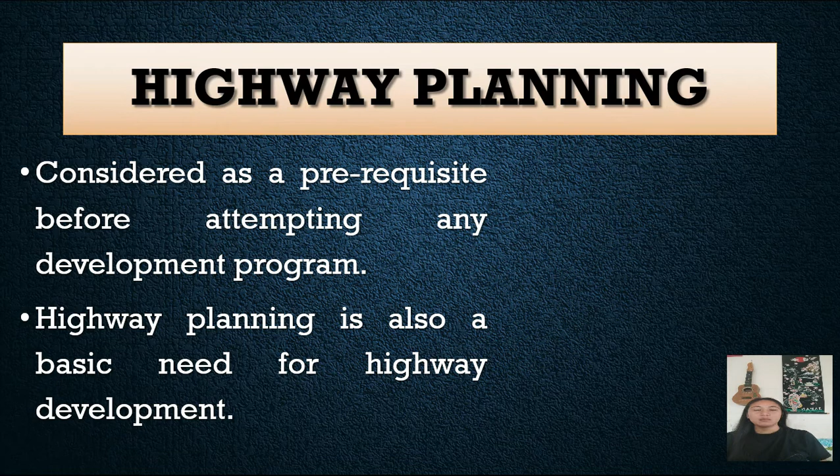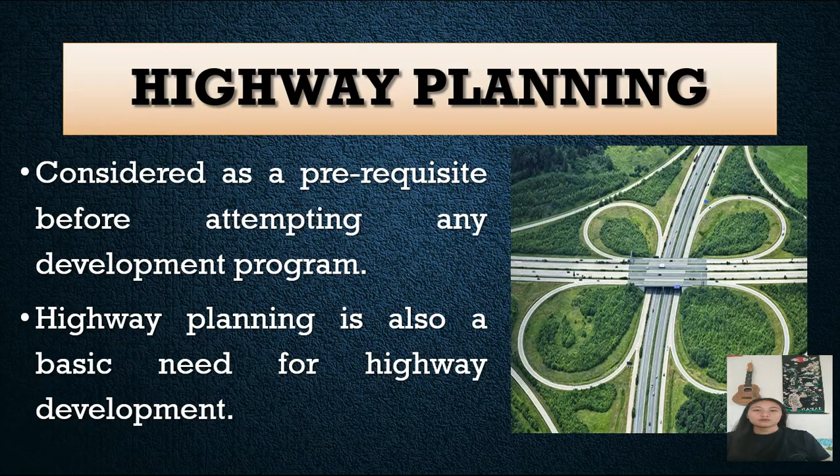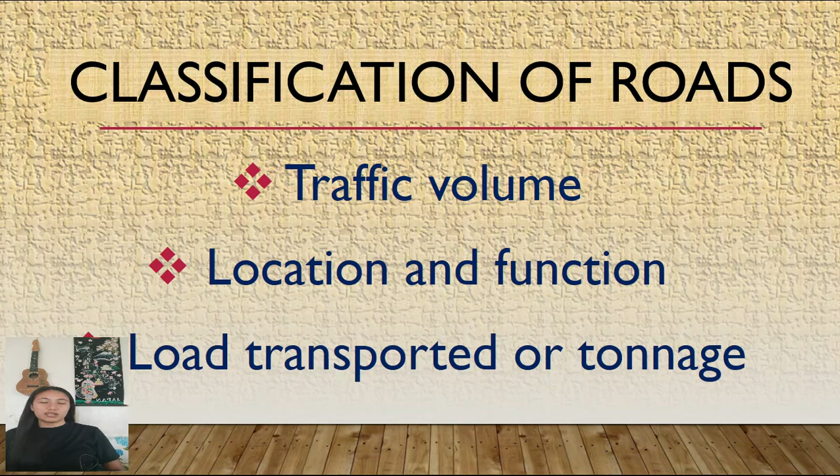Third, to fix phase-wise priorities for development of each road link. Fourth, to plan for future requirements and improvements of roads. And lastly, to work out a financing system. Roads are generally classified on the following basis: traffic volume, location and function, and load transported or tonnage. Let's discuss them one by one.

Based on the traffic volume, roads are classified as light, medium, and heavy traffic roads. First is the light traffic roads. Roads carrying less than 400 vehicles daily on average are called light traffic roads. Second is the medium traffic roads. If a road is carrying 400 to 1,000 vehicles per day, then it is said to be a medium traffic road. And lastly, the heavy traffic roads. If a road is carrying more than 1,000 vehicles per day, it is said to be a heavy traffic road.

Based on location and function, they are national highways, state highways, major district roads, other district roads, and village roads. National highways are main roads of a particular country. They connect all major cities to the capital of the country. They run throughout the length and breadth of the country. A minimum 2-lane road is provided for national highways.

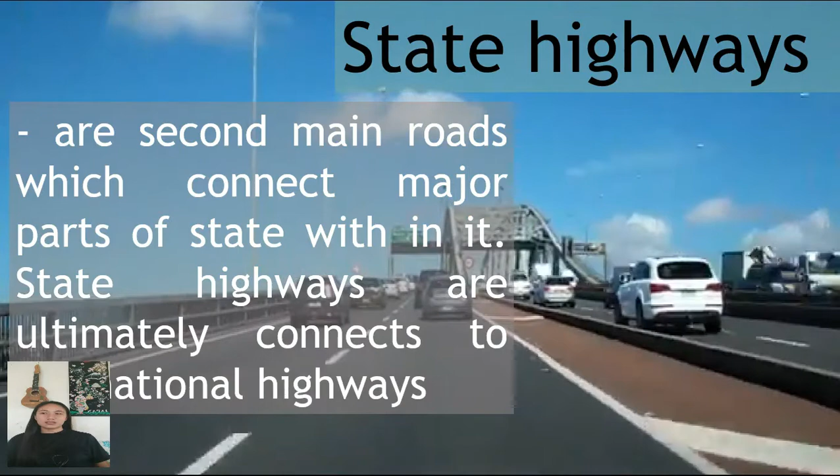State highways are second main roads which connect major parts of states within it. State highways ultimately connect to the national highways. Major district roads are important roads within a district serving areas of production and markets and connecting those with each other or with the main highways of the district.

Other district roads are roads serving rural areas of production and providing them with an outlet to market centers, taluk headquarters, block development headquarters, or other main roads. Village roads are roads connecting villages or groups of villages with each other or to the nearest road of a higher category. Usually low quality roads are provided as village roads because of low traffic.

And lastly is based on load transported or tonnage. The classification based on load or tonnage is relative, and the roads may be classified as Class 1, 2, etc., or Class A, B, etc. And the limits may be expressed as tons per day.

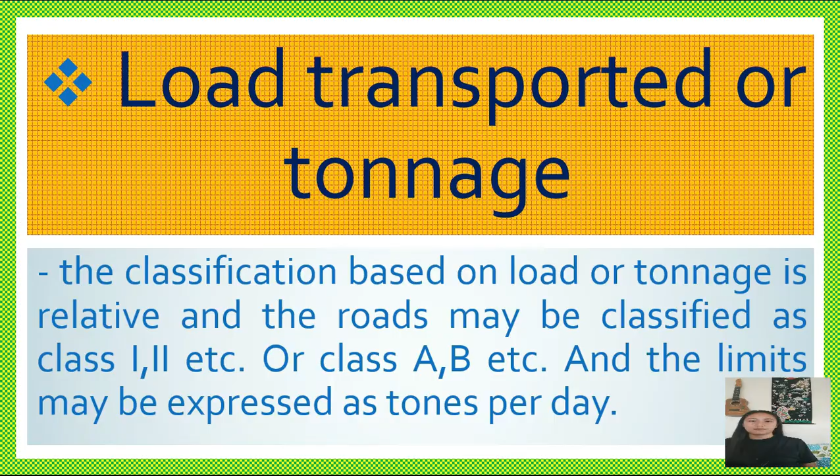Next is the classification of urban roads. They are arterial roads, subarterial roads, collector streets, and local streets. Arterials and subarterials are streets primarily for through traffic on a continuous route, but the subarterials have a lower level of traffic mobility than the arterials. Collector streets provide access to arterial streets, and they collect and distribute traffic from and to local streets, which provide access to abutting property.

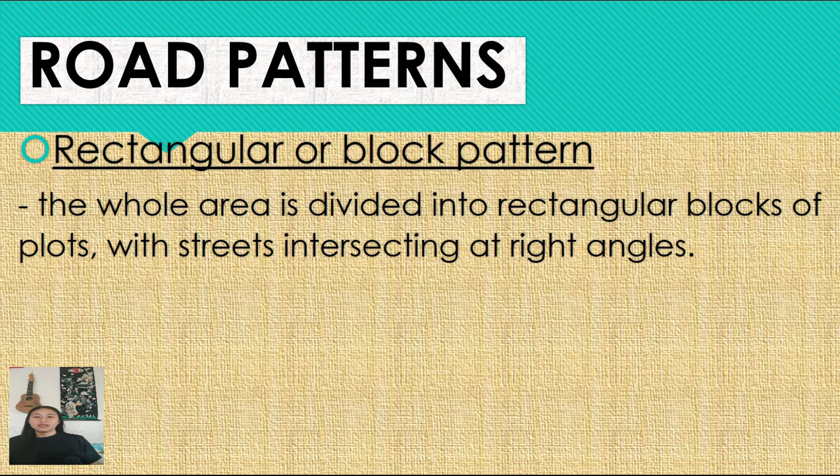Next, we'll talk about the different road patterns. First is the rectangular or block pattern. In this pattern, the whole area is divided into rectangular blocks of plots, with streets intersecting at right angles. The main road, which passes through the center of the area, should be sufficiently wide, and other branch roads may be comparatively narrow. The main road provides a direct approach to outside the city.

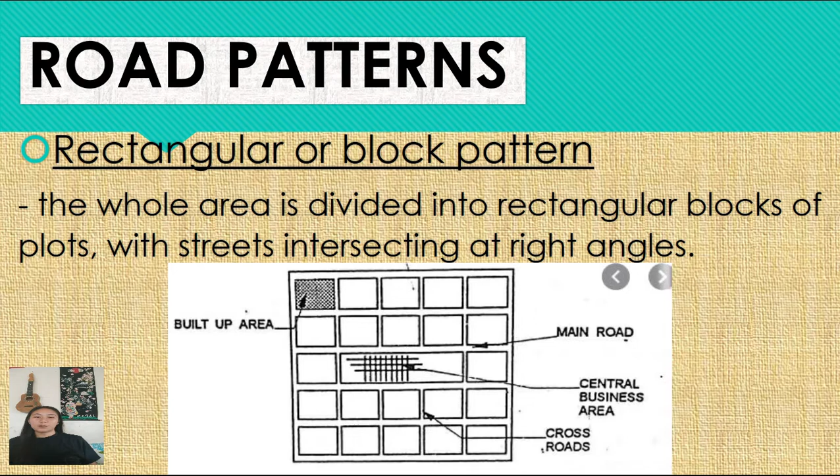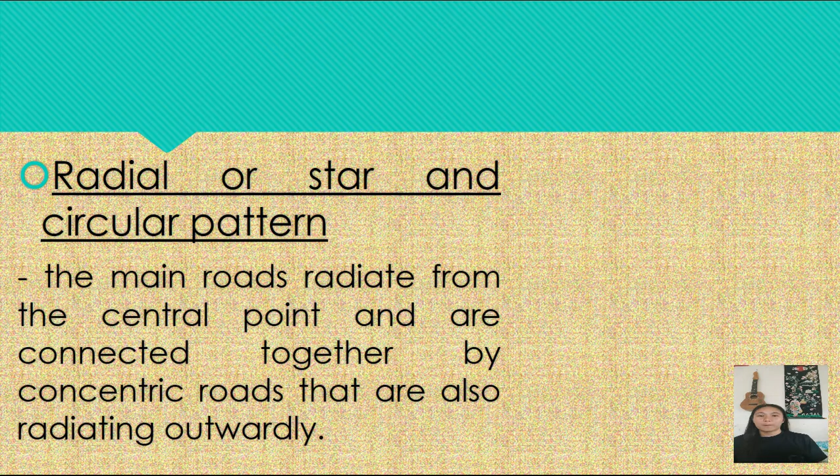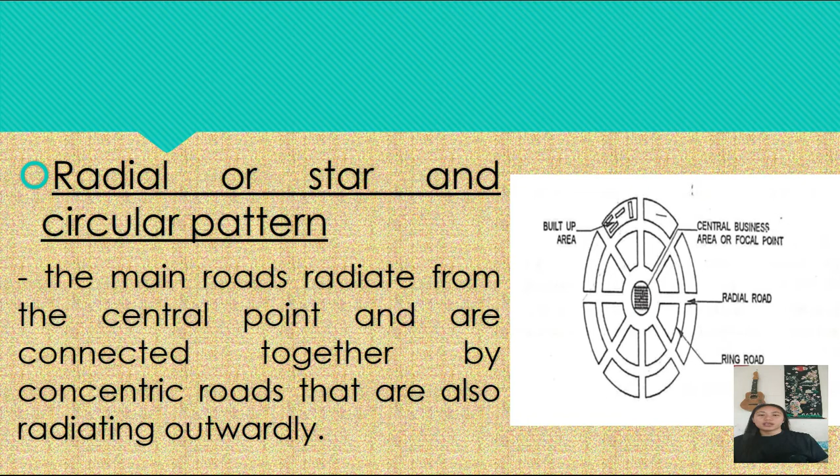Next is the radial or star and block pattern. In this pattern, the entire area is divided into a network of roads radiating from the business center outwardly. In between radiating main roads, the built-up area may be planned with rectangular blocks. Next is the radial or star and circular pattern. In this type, the main roads radiate from the central point and are connected together by concentric roads that are also radiating outwardly.

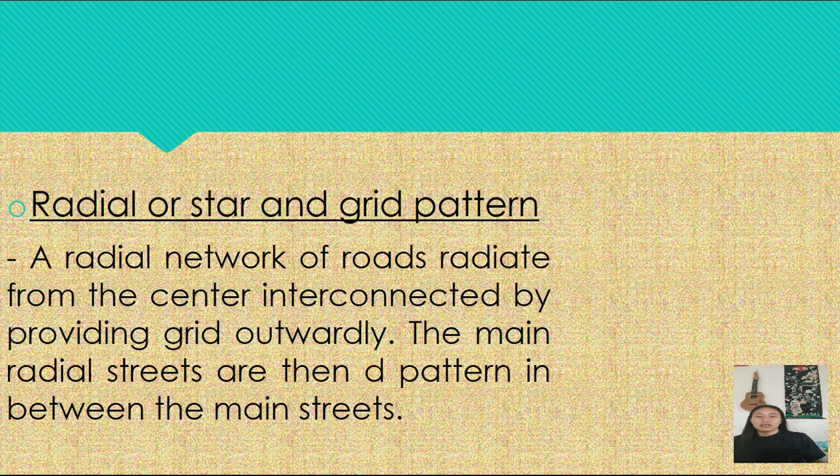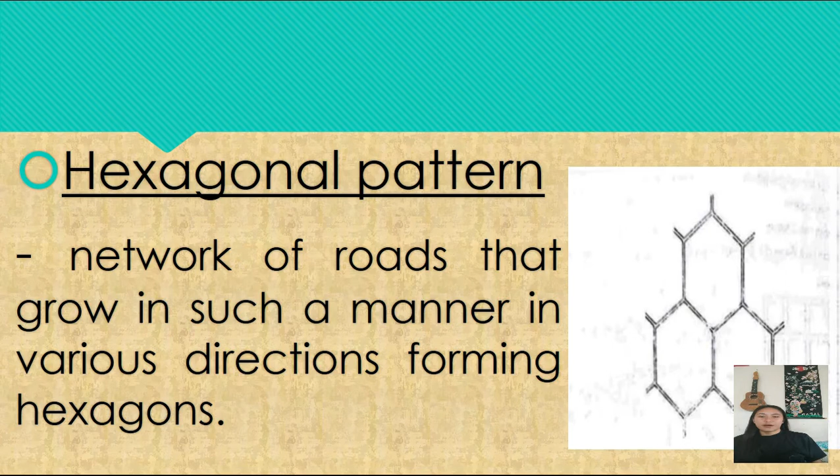Next is the radial or star and grid pattern. It is a combination of radial and grid pattern. A radial network of roads radiates from the center, interconnected by providing a grid outwardly. The main radial streets are then patterned in between the main streets. Next is the hexagonal pattern. This pattern is a network of roads that grow in various directions, forming hexagons.

And lastly is the minimum travel pattern. In this road pattern, the town is connected by sector centers, suburban facilities, and neighborhood centers, by the highway, which requires minimum time to reach the city center.